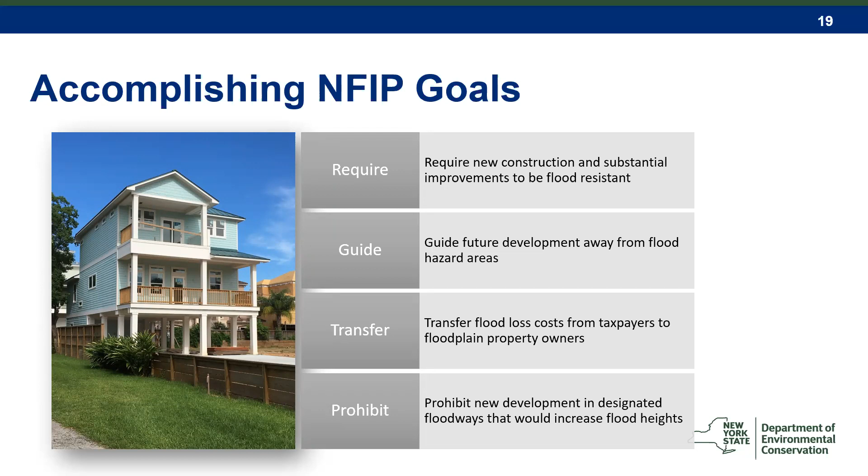So moving on to roles and responsibilities. At the federal level, FEMA is the agency that is responsible for the administration of the National Flood Insurance Program. So they develop the maps that the regulations are based on. They also provide flood insurance. They set the minimum building codes and standards within those areas. They determine community compliance, and then they also have enforcement authority for this program.

The Army Corps of Engineers sometimes gets involved within this program as they can develop flood studies to support the development of regulatory mapping, and they also provide some other floodplain management related services as well.

So at the state level, DEC is designated as the state coordinating agency for the National Flood Insurance Program. So we contract with FEMA to assess community compliance and then work with communities on compliance issues. We provide technical assistance as well as developing a state model ordinance for flood damage prevention. Assessing community compliance is through those community assistance visits or community assistance contacts where either the state or FEMA will come out and meet with the community to talk about the requirements of the program and the local administration.

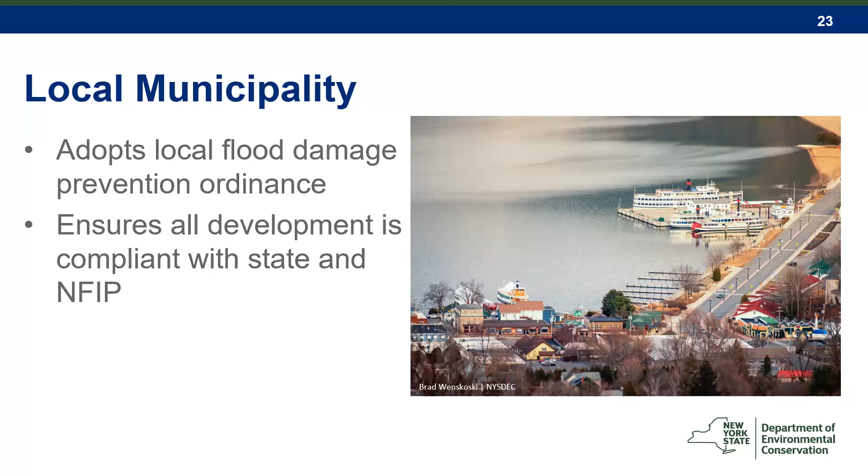So that leads me to our first poll question. Poll question number 1 is going to be a true or false. The DEC permit unit considers local floodplain regulations and NFIP requirements during the review of all permit applications. Okay. So we'll just give it a little bit for responses to come in.

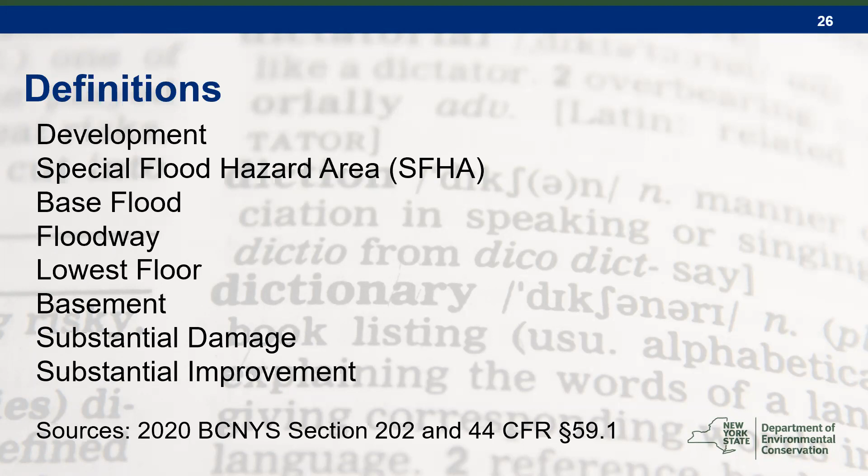Okay, so I'm going to move on to some important definitions. Each of these is going to be covered in this section. I've also included the sections where you can find these definitions within the building code as well as the federal regulations.

So the definition of development for floodplain management purposes is really broad. It essentially means any man-made change to the floodplain. That includes, but is not limited to, buildings or other structures, mining, dredging, filling, grading, paving, excavating, storage of equipment or materials. All of that is considered development under the floodplain management regulations and would require a local floodplain development permit.

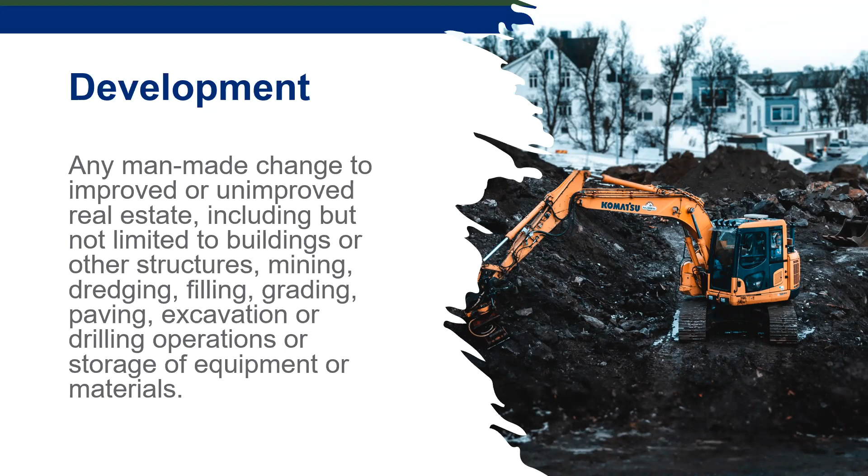So the special flood hazard area is what's referred to as that high risk area or the floodplain. It's the land within a community that's subject to a 1% or greater chance of flooding in any given year. The zones on your maps are going to start with an A or a V, so that's a quick way to know whether it's within the 100-year floodplain.

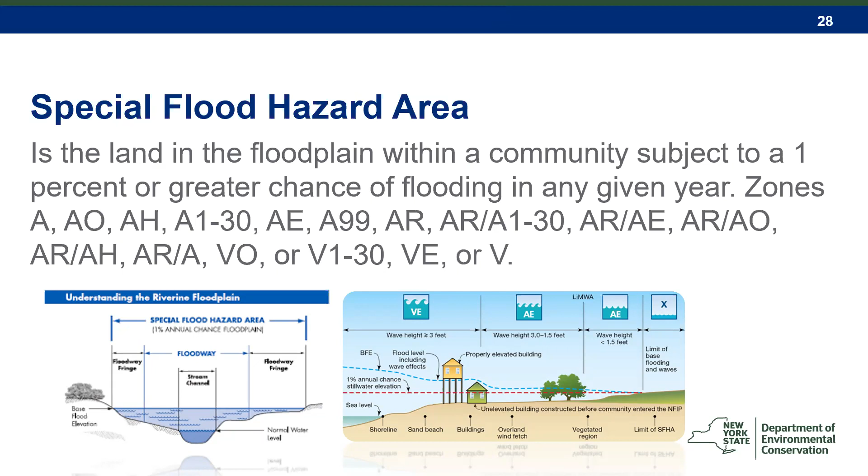So the base flood, previously referred to as the 100-year flood, is the flood having a 1% chance of being equaled or exceeded in any given year. We really try to get away from using the term 100-year flood because it gives the misperception that it's something that's only going to happen once every 100 years.

But this graphic on the slide shows that if you have a structure, say your home is within that 100-year floodplain, and you have a mortgage on your property. Most mortgage terms are for a 30-year period. Over that 30-year mortgage period, you would have a 26% chance of flooding. So much greater than once every 100 years.

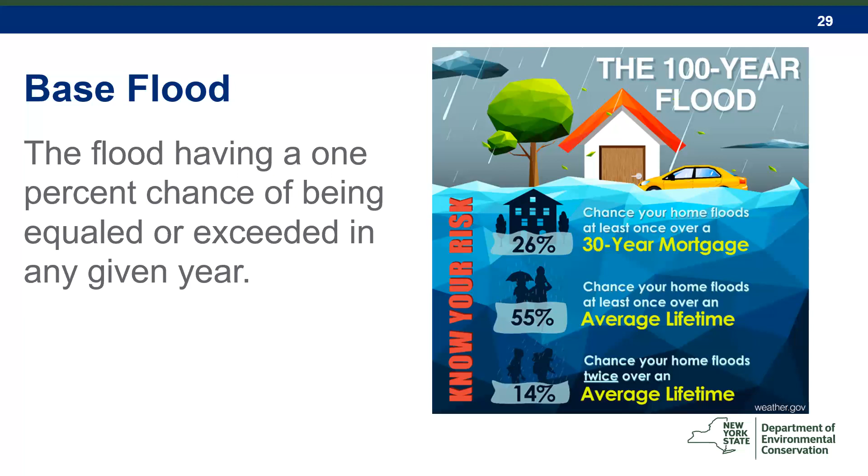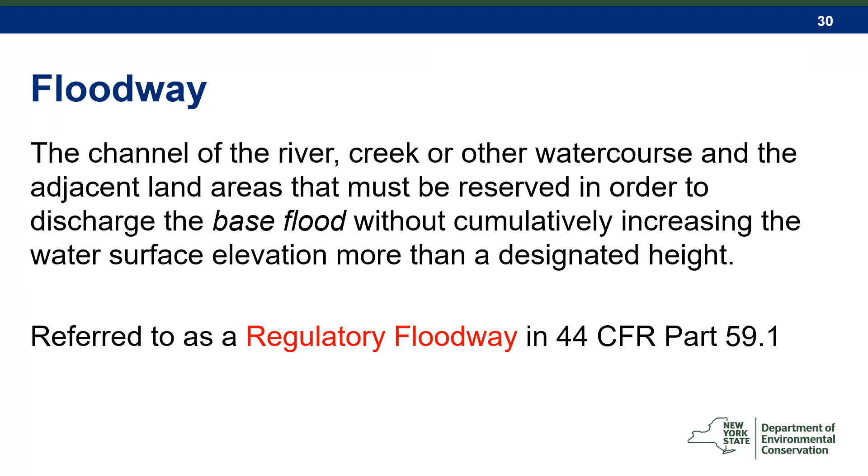So the floodway is an area within the floodplain that is the channel of the river, creek, or other watercourse and the adjacent land areas that must be reserved in order to discharge the base flood without cumulatively increasing the water surface elevation more than, like, any increase in New York State. So that's a 0.00 foot rise. And I'm going to show you how that is modeled and shown on the map.

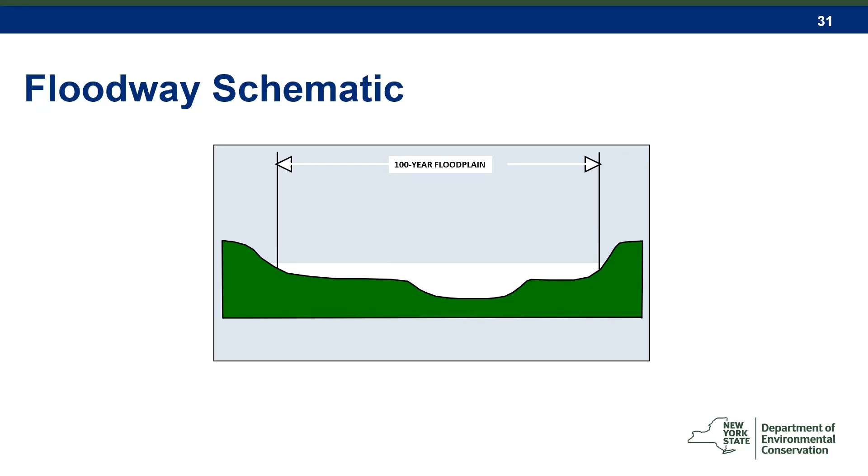So this is showing a cross section of a stream. You can see where the natural channel is here, and this would be the limits of the 100-year or 1% annual chance floodplain. When they're determining the limits of the floodway, they model encroachments or fill being placed on either side of the stream until it results in a 1 foot surcharge at any of those modeled cross sections. Once that 1 foot is reached at any of those cross sections, that designates the limit of the floodway.

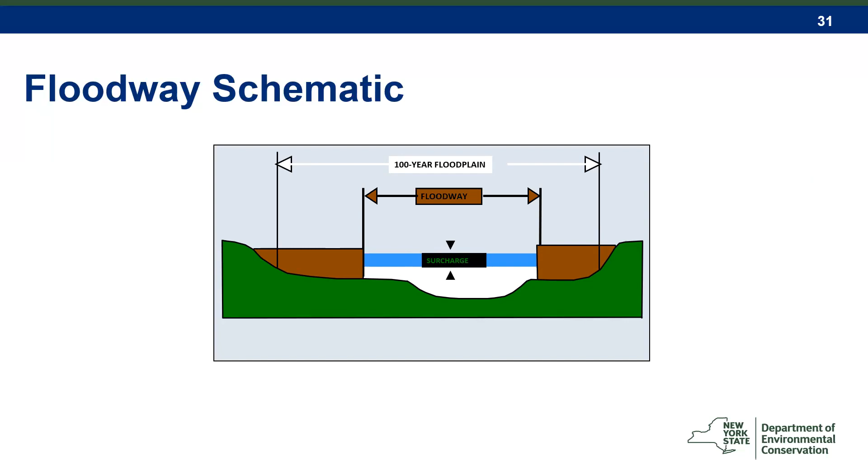So essentially, all development is prohibited within the floodway unless you have an engineering analysis completed that demonstrates that development will result in a 0.00 foot rise.

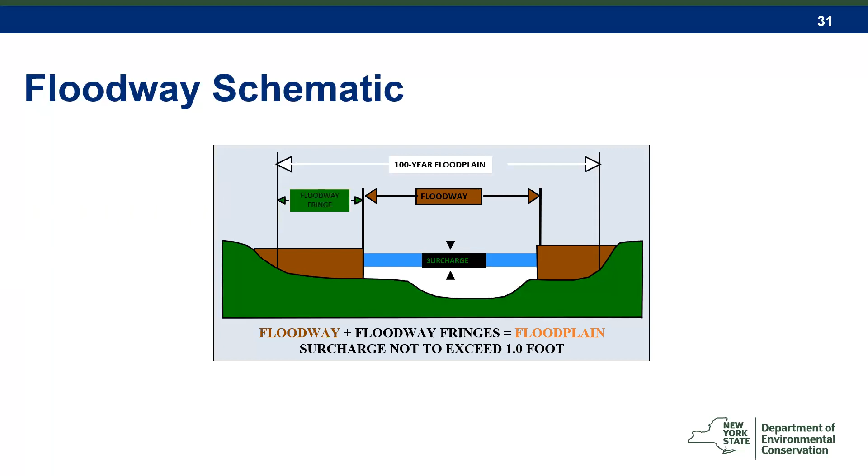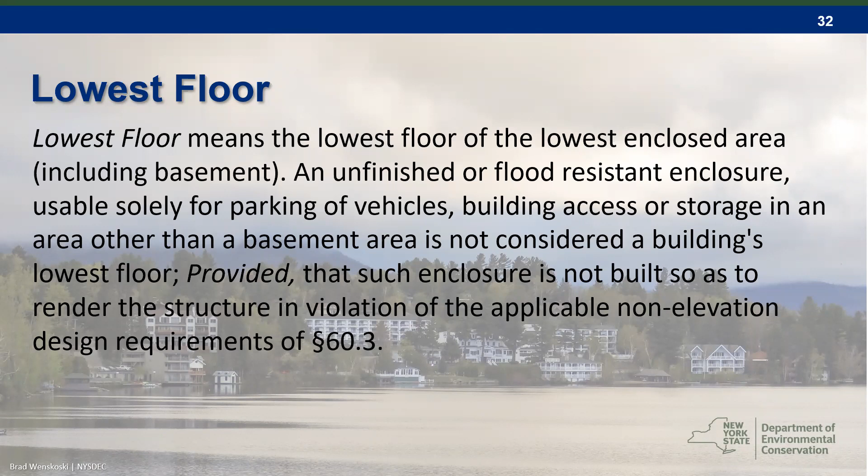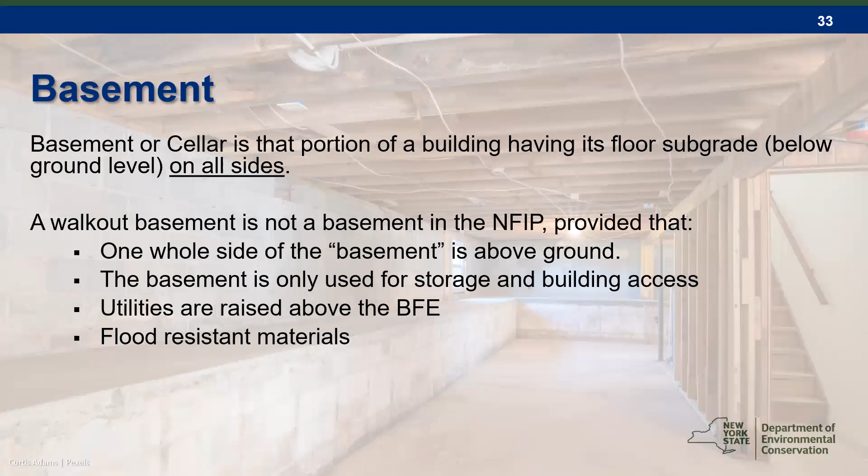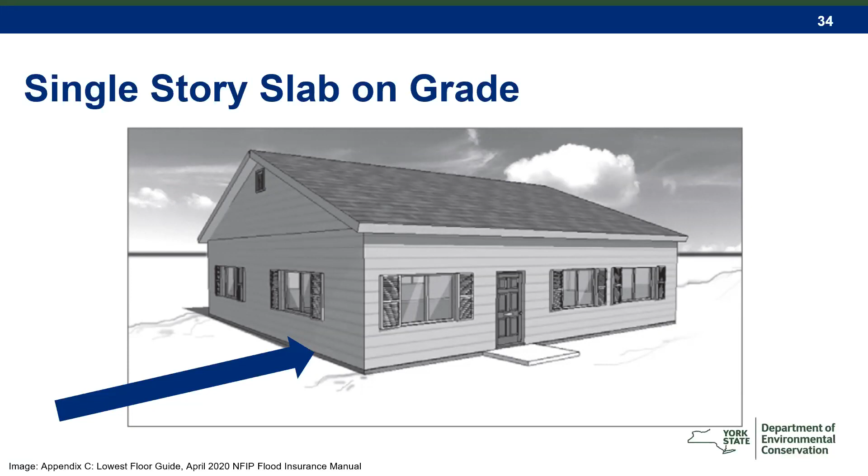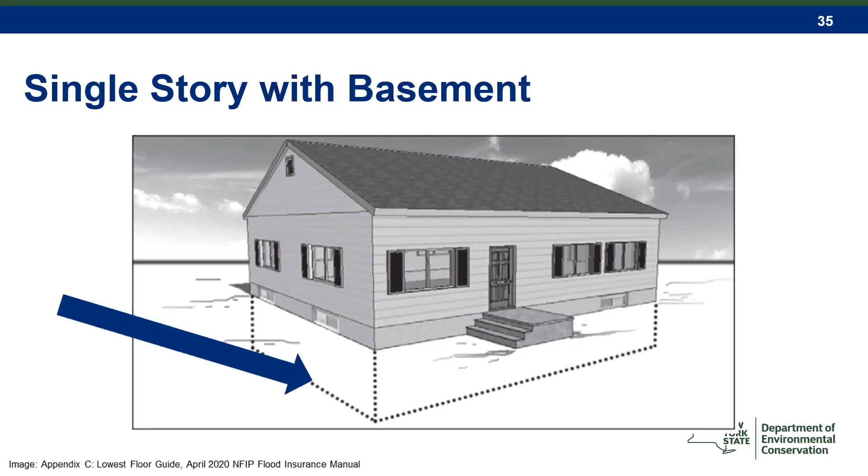Okay, so these give a couple examples of where the lowest floor would be based on different construction types. For a single-story slab on grade home, the lowest floor would be the top of the slab. For a house with a basement, the lowest floor would be the basement slab. For mobile homes with vinyl or aluminum skirting, meaning it's not hard, structural skirting around the building, the lowest floor would be the bottom of the frame.

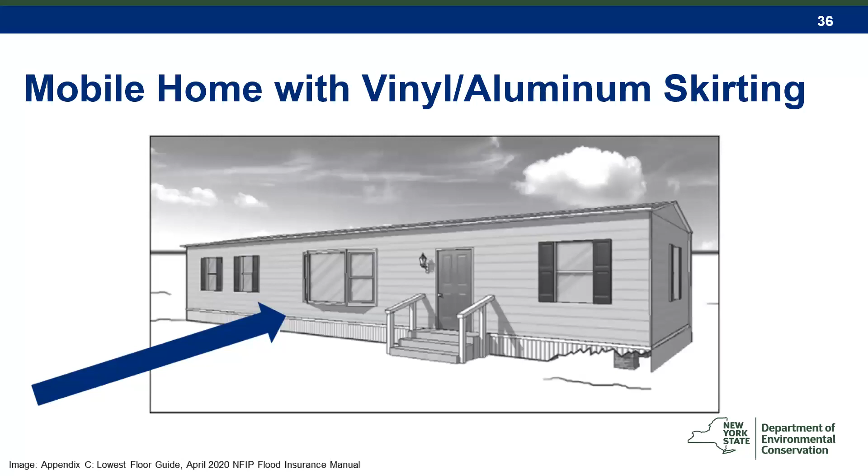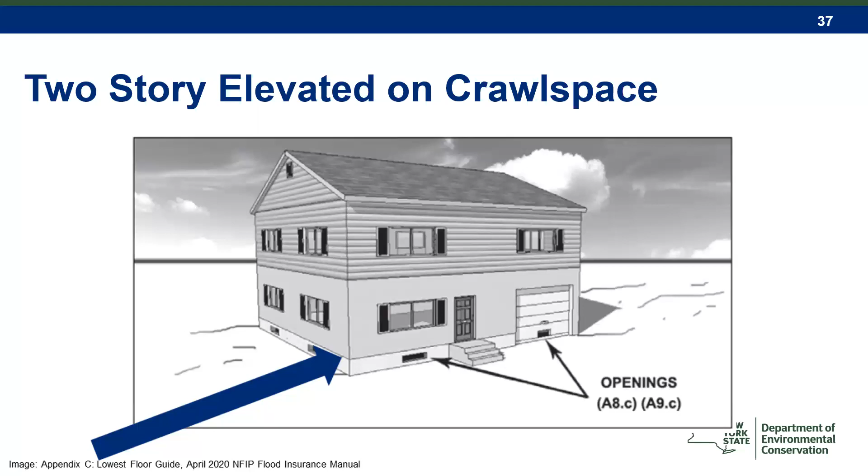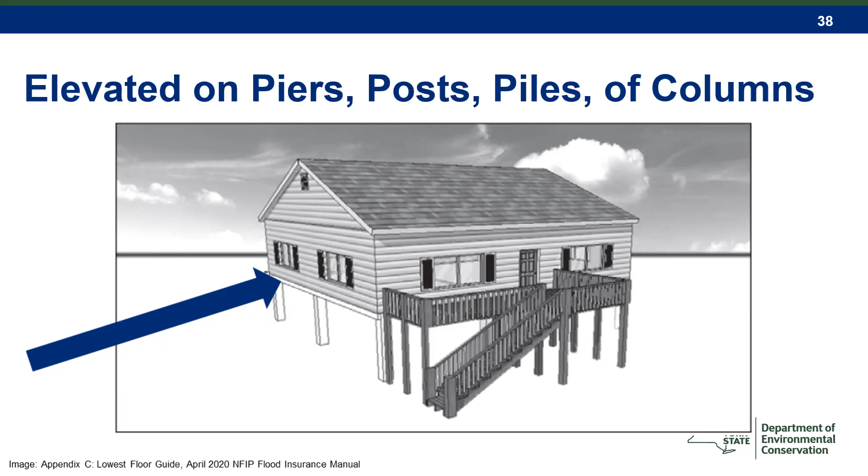So substantial damage is damage of any origin sustained by a structure where the cost of restoring the structure to its before damaged condition would equal or exceed 50% of the market value of the structure before the damage occurred. So one of the key things here is that it is damage of any origin. So it's not just flood damage. So this would apply if there was a fire, an ice storm, a tree falling on it, any kind of damage where it would reach this 50% threshold. And if the structure is within the floodplain, then it's required to come into compliance with current flood damage resistant construction requirements, so elevated.

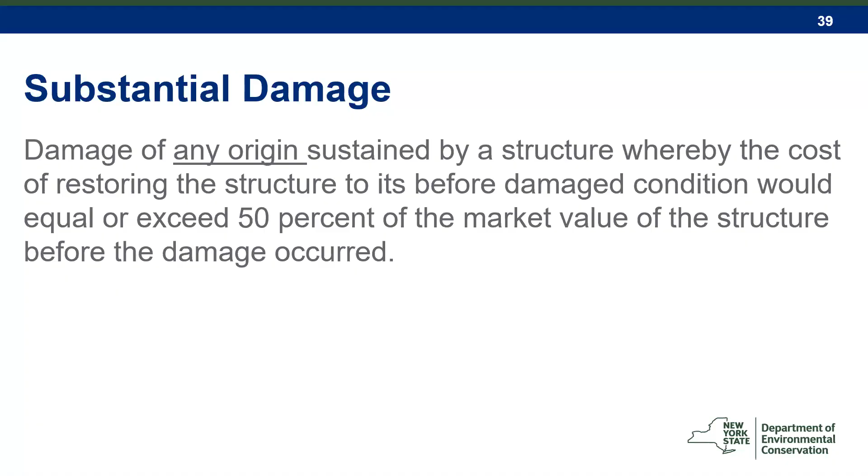Substantial improvement is very similar to substantial damage, but it includes any reconstruction, rehabilitation, addition, or other improvement to a structure where the cost of that improvement equals or exceeds 50% of the market value of the structure before the start of that improvement.

So an example I typically give here is that if you have a house that's located within the floodplain and it's currently worth $100,000 and the owner wants to put in a new gourmet kitchen and a master ensuite, and that project is going to cost $60,000, then they would be required to bring that whole structure into compliance with the floodplain regulations. So elevating it 2 feet above the BFE. And the reason behind this requirement is that FEMA doesn't want people investing a lot of money into a property without first making it more resilient to flood damages.

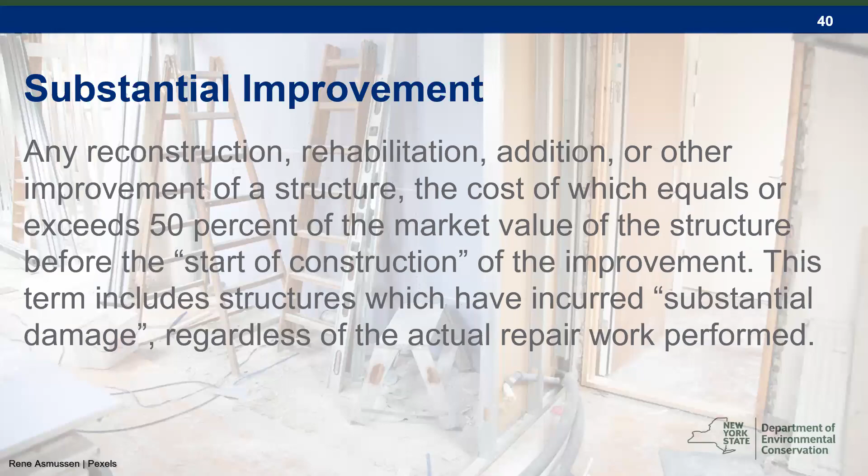So when talking about substantial improvement, there are certain things that are not included in that determination. So any project for improvement of a structure to correct existing violations of state or local health, sanitary, or safety code. The key thing is that these have to be previously identified and cited by a local code enforcement official. And it would only be the minimum necessary to correct the violation.

And then any alteration of a historic structure, provided that that alteration would not remove the structure from its historic designation. When we're talking about historic structures, that means they have to be designated on either a state or a federal registry to be considered historic.

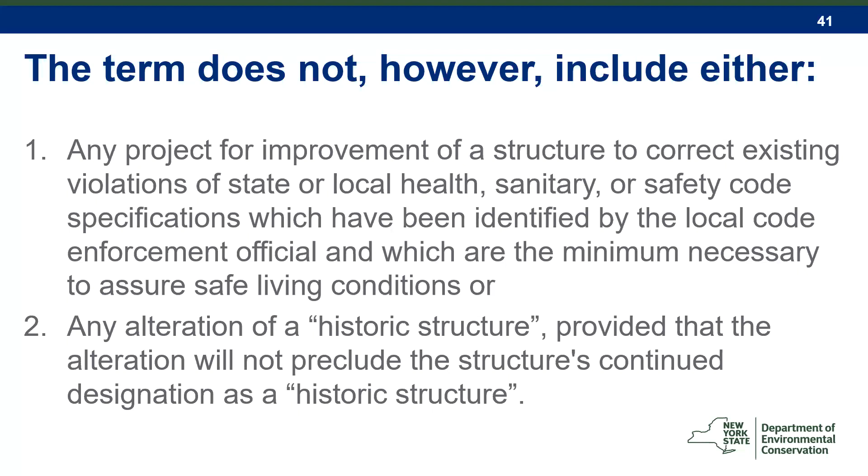Okay, so on to our next poll question. So poll question number 2, a structure could be considered substantially damaged due to A, a fire, B, flood, C, tree falling on the structure, or D, all of the above.

Okay, so if you haven't submitted your answer, go ahead and wrap it up. Okay, so the correct answer here is D, all of the above. So damage from any origin that would bring it over that 50% threshold.

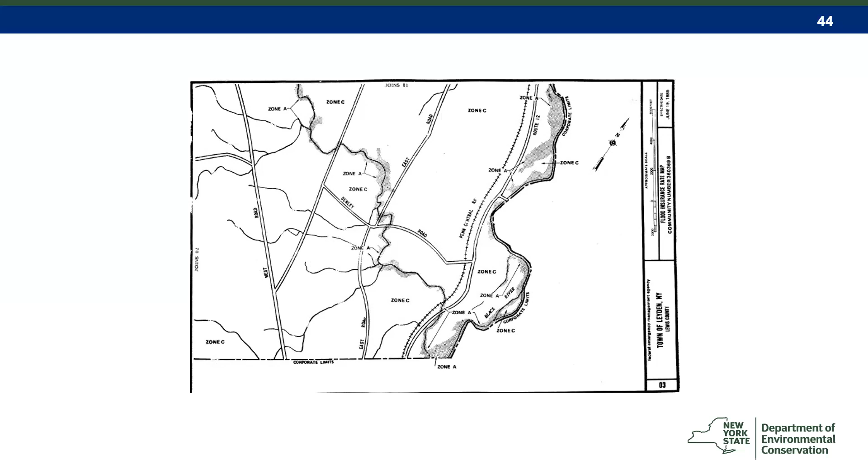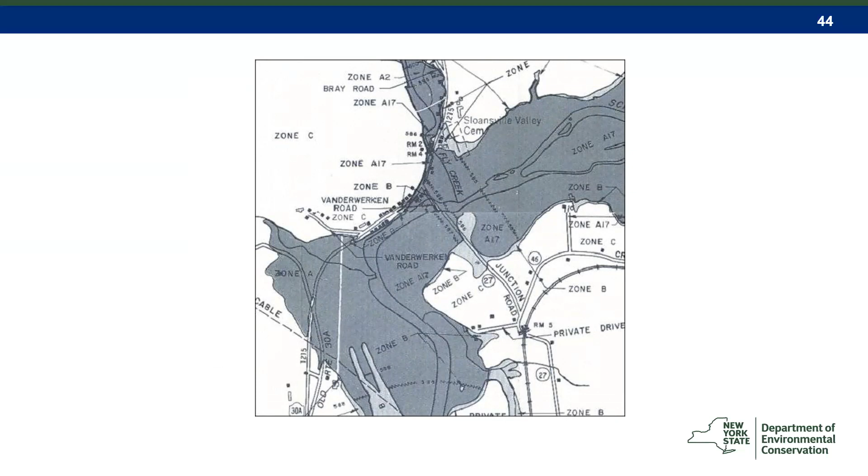Then we start to see mapping that looks a little bit more like this. That gray shaded area is designated as Zone A, and that's within the 100-year floodplain. So still difficult to use, and some communities in New York still have this as their effective regulatory mapping. So this is a FIRM that has a detailed study, meaning that there are elevations established for this. So those numbered A zones have a base flood elevation determined.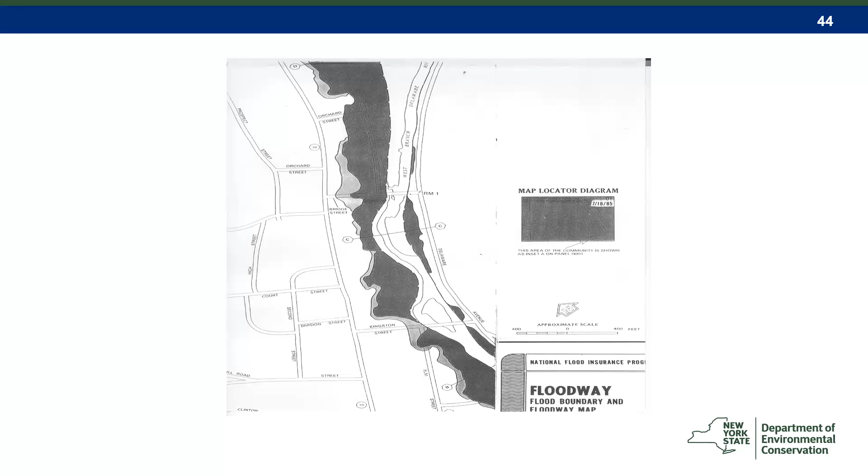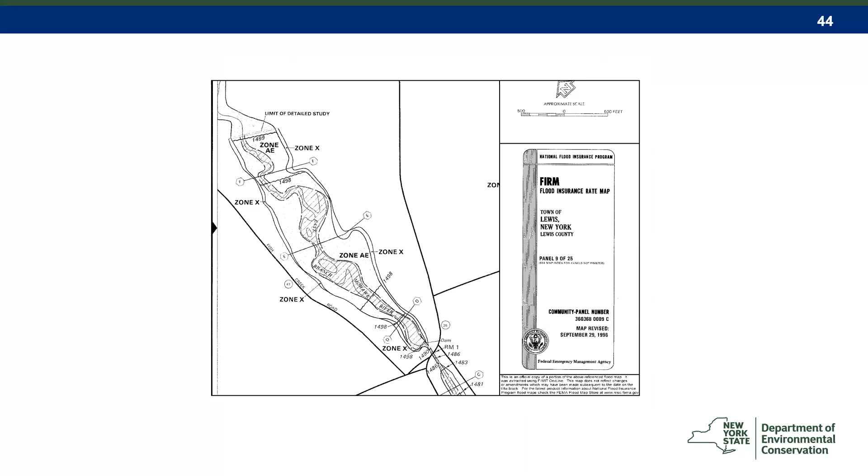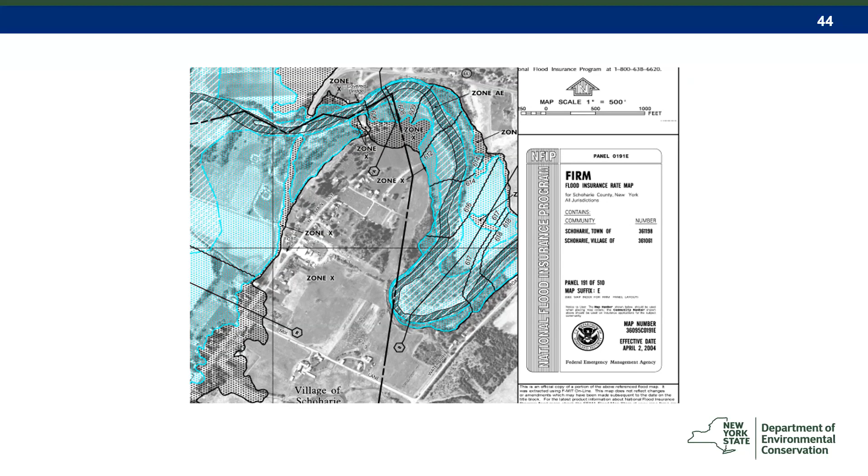So the next iteration of mapping, we see that they have the floodway designated on the same panel, and that's shown as that crosshatched area in the center. In the early 2000s, they started to move towards map modernization to allow for mapping to be in a digital format. So it was produced so it can be over aerial imagery, which makes it a lot easier to identify whether a structure or particular development is located within the floodplain.

And this is what the mapping looks like for most communities now that are getting new updated studies. So the floodway is shown as that red hatched area in the center. This is also showing an area that is susceptible to both riverine and coastal flooding impacts. So those V zones shown on the left stand for velocity. Those velocity zones are susceptible to wave action and wave run up as well.

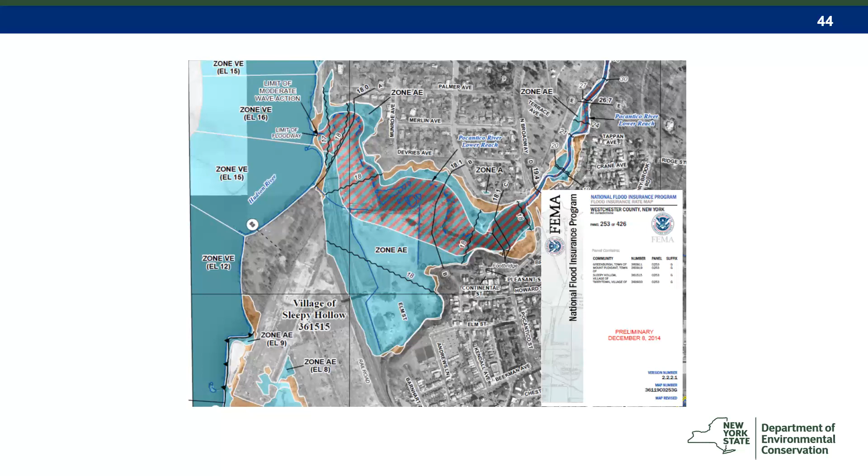Once we move into map modernization and digital products, mapping is done on a county-wide basis instead of a community basis. So you would see a map panel number that would list potentially multiple communities that are on that particular panel.

So when trying to read an older paper-based map, you first want to look at that map index to find which panel your property or development is going to be on. So you want to look for any major roads and waterways to kind of figure out where your location is, and then figure out which particular panel you are going to be looking at. Once you have the correct panel number, you can navigate to your particular site location.

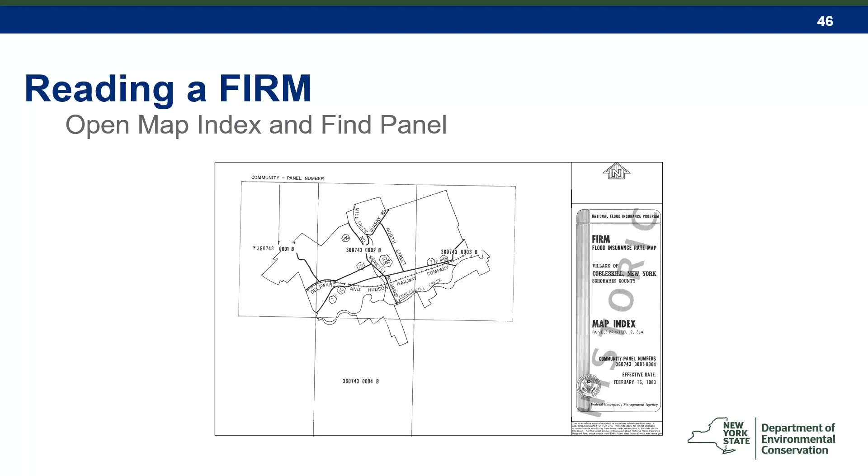So some map features to look out for. This is showing an example. This is not what most FIRMs look like, but this is an area that has a portion that has a detailed study, that zone AE, with base flood elevations established. It also has an approximate or unnumbered zone A at the top there, which means it's an area without base flood elevations established. The wavy lines on the map show approximate base flood elevations. In order to get the detailed base flood elevations, you would need to use the flood profiles in the back of the flood insurance study.

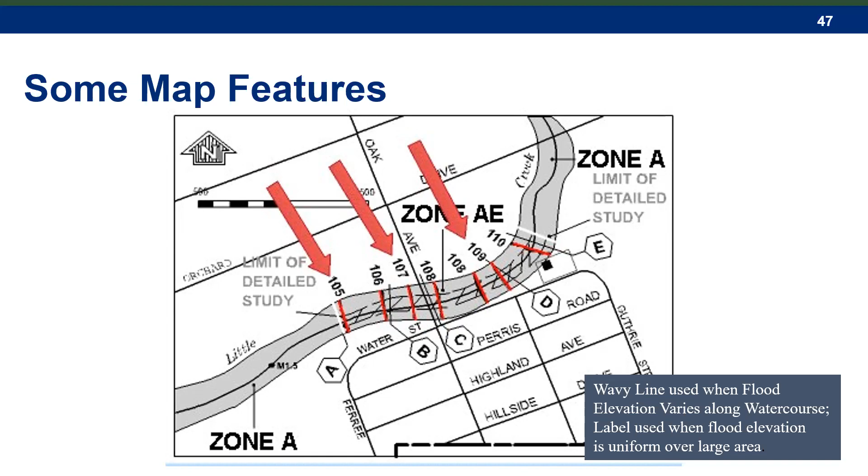So looking at a flood insurance study, this is a document that includes all of the engineering support for development of the mapping. So it has information for how the maps were developed. It provides information related to flooding impacts within the community, how they determined the hydrology and the hydraulics for the study. So there can be a lot of really helpful information in there.

So some helpful sections that might be included within the flood insurance study are going to be for still water elevation. So if you have areas that have flood impacts related to Great Lakes or inland lakes, these can be really helpful tables to refer to. So this one shows what the flood elevations are for different annual chance events. The one you would be looking at is that 1% annual chance event. So you can see for this particular community, looking at Cayuga Lake, for the 1% annual chance, the base flood elevation is going to be 385.8.

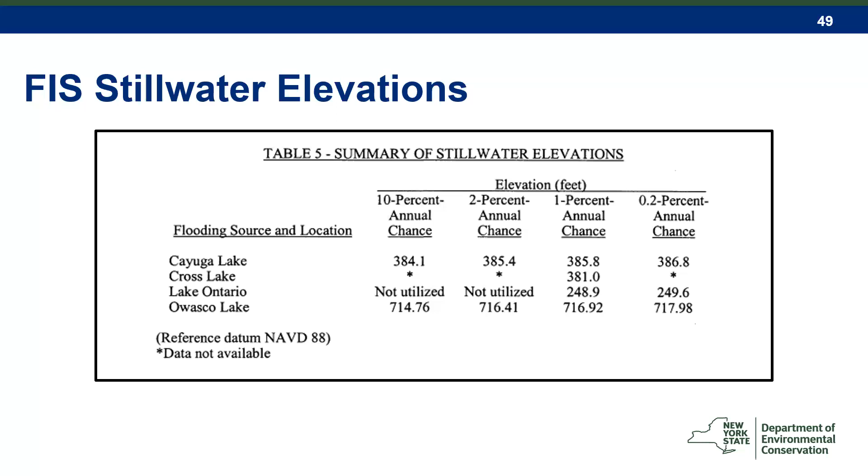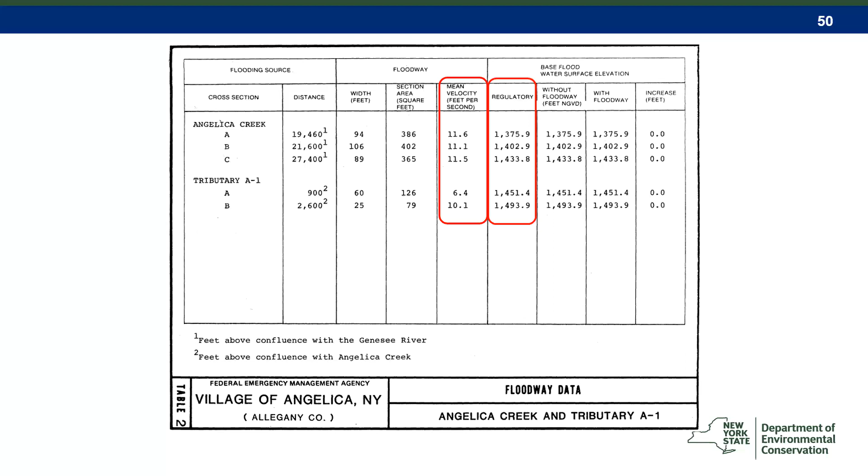You can also find out what that regulatory base flood elevation is at that particular cross section. This can be helpful. It's not very often that development will fall right at a cross section, but if it does, then that can be used as the base flood elevation when determining how to properly elevate a structure. But when you are looking at what is the base flood elevation for your particular site, you can determine if you're close or within range, if that number is within the base flood elevation shown between those two cross sections.

So this is showing kind of how those relate. So on the right-hand side, you see an example of a flood insurance rate map. You can see where those cross sections line up to that floodway data table in the flood insurance study. So cross section E corresponds to that cross section E shown on Pinnacle Creek here. You can see what the mean velocity is at that cross section, which is 3.5 feet per second. And then the regulatory base flood elevation at that cross section, which is 569.5.

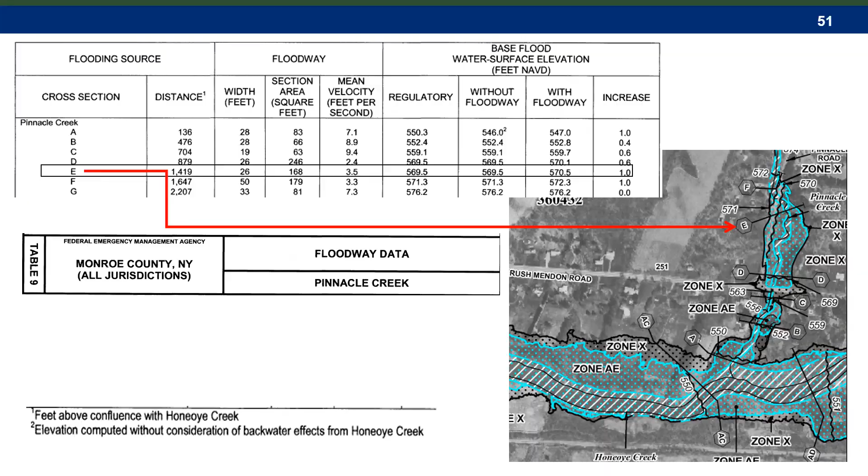So this is what you would need to use in order to find the detailed regulatory base flood elevation where there's a detailed riverine study. So in a riverine floodplain, you need to go to the flood profile in order to get the base flood elevation to the nearest 1/10 of a foot.

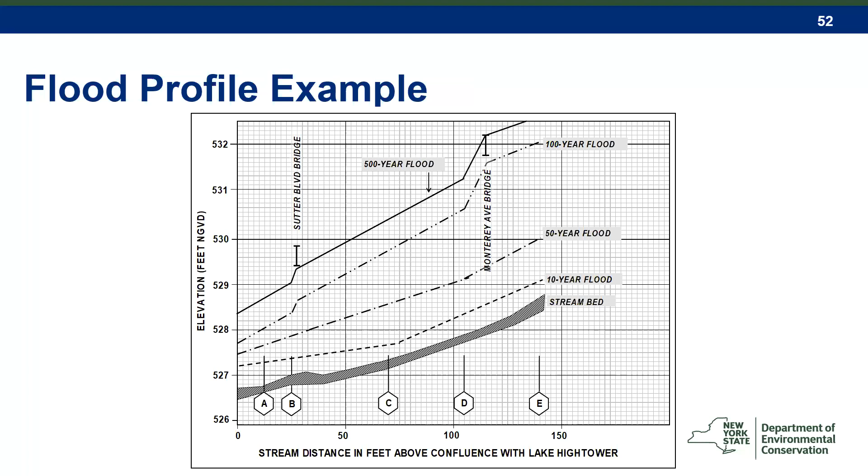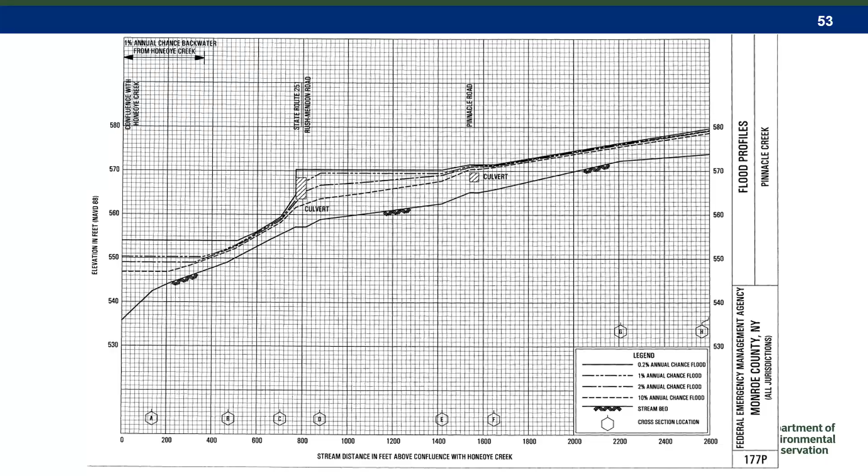So this is showing that same FIRM and where that flood profile lines up to those particular cross sections. I mentioned here highlighting that one culvert that is sized so that it can pass that 1% or 100-year event.

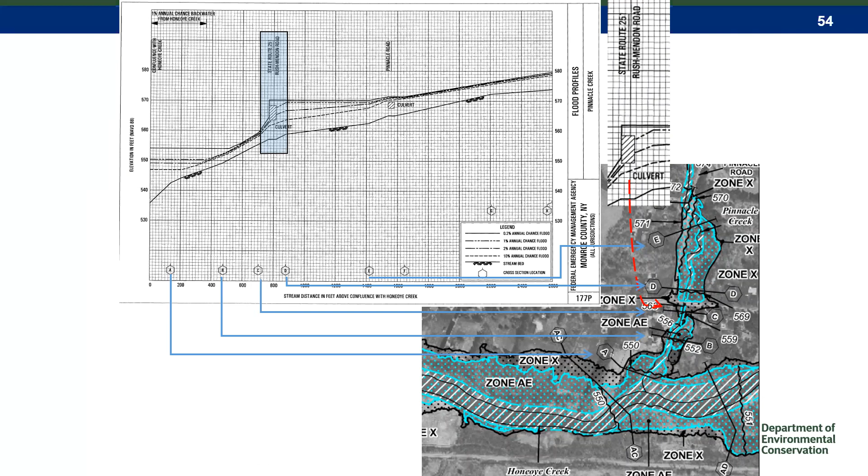So I did just want to mention some base level engineering and what that is and what it can be used for. So like I mentioned, there are many communities within New York State that are still using paper-based maps as their effective regulatory products. So base level engineering is a product that's available and can be used as best available information in communities that do not yet have digital mapping.

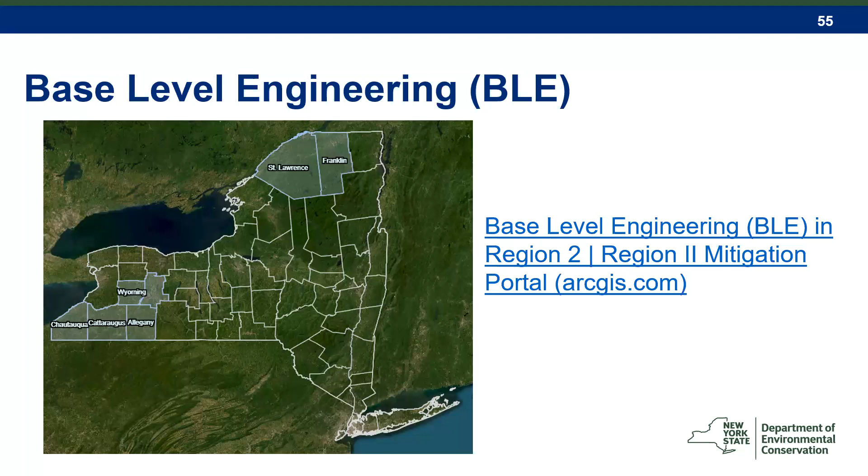So BLE is an engineering method that combines high resolution ground elevation data and modeling software to generate watershed-wide flood hazard information. So it makes it much more cost effective. It does not include any ground truthing or surveys to support that. It's using LiDAR data when modeling.

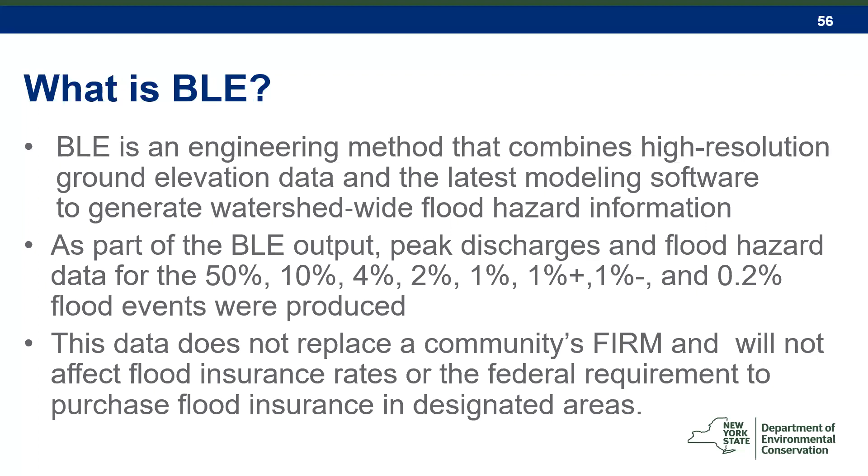As part of that BLE output, it does develop peak discharges and flood hazard data for various flood level events. And this data does not replace a community's flood insurance rate map, and it won't affect any flood insurance rates or flood insurance purchase requirements, but it can be used as best available data.

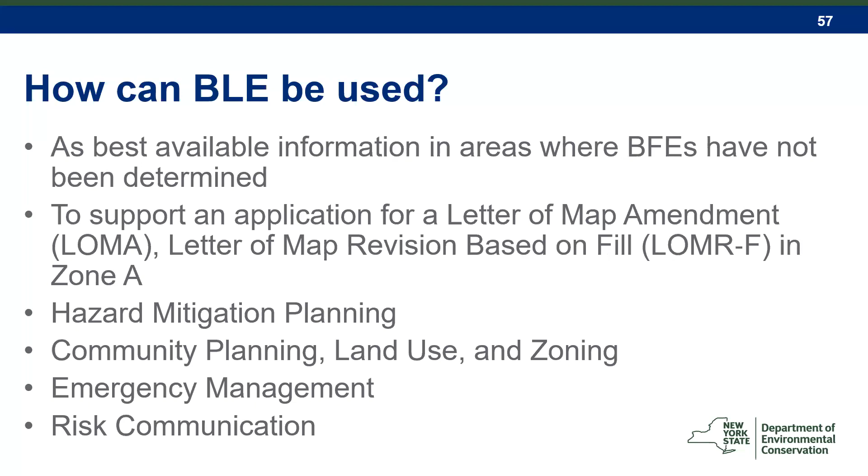So in areas where there are not base flood elevations established, you can use this base level engineering mapping that does have base flood elevations established as regulatory. It can be used to support an application for a letter of map amendment or a letter of map revision based on fill to FEMA to remove a particular property or structure from the mapped floodplain in order to remove that mandatory purchase requirement for flood insurance. It can also be used for hazard mitigation planning, community planning, emergency management, as well as risk communication.

If you are looking for more local support, again, they should be available at the local community offices. Sometimes county and regional planning offices will have copies of the maps, but you can also reach out to DEC, either our regional offices or me if you're looking for a map and you can't find it or wondering whether a proposed development would be within the floodplain.

So our third polling question. So where do you get the base flood elevation or BFE to the nearest 1/10 of a foot in a riverine floodplain? So A, the flood insurance rate map or FIRM, B, the flood profile in the back of the flood insurance study, or C, the summary of still water elevations table, or D, USGS river gauges?

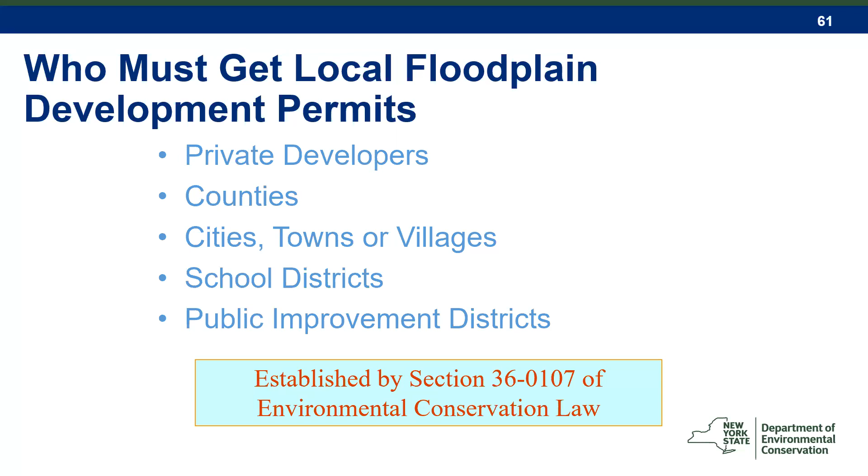So for residential construction, any new or substantially improved residential construction is required to have the lowest floor, including a basement, elevated to or above the base flood elevation, plus 2 feet of freeboard in New York State. They're required to obtain and reasonably use data from a federal, state, or local source if there is no base flood elevation established on their current mapping.

If there isn't an available base flood elevation through other sources, then they're required to have a professional develop that flood elevation by doing an analysis for that particular site. And then any subdivisions or other type of development that's over 50 lots or over 5 acres requires the applicant to provide flood elevation data and then build accordingly.

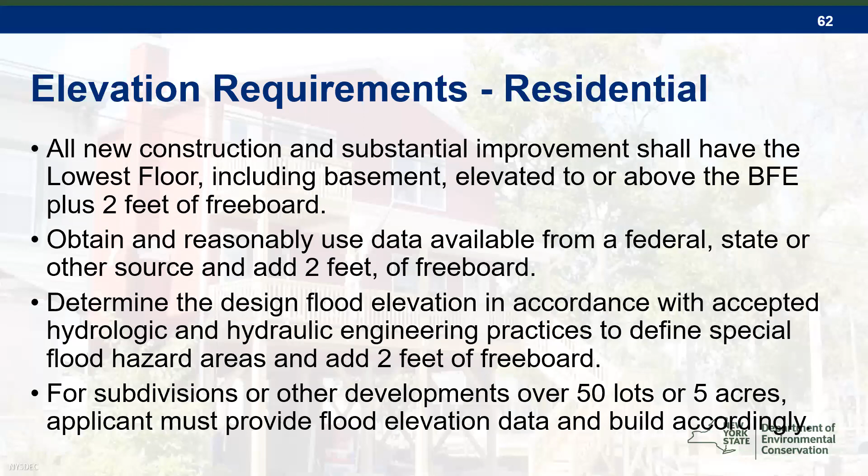So elevation options when talking about residential structures is that you can elevate on an open foundation, so posts, piles, columns, or piers. You can also elevate on a stem wall foundation, full story foundation walls, a crawl space, or a fill pad. And each of these technical bulletins that are shown on the right here provide additional guidance on each of those.

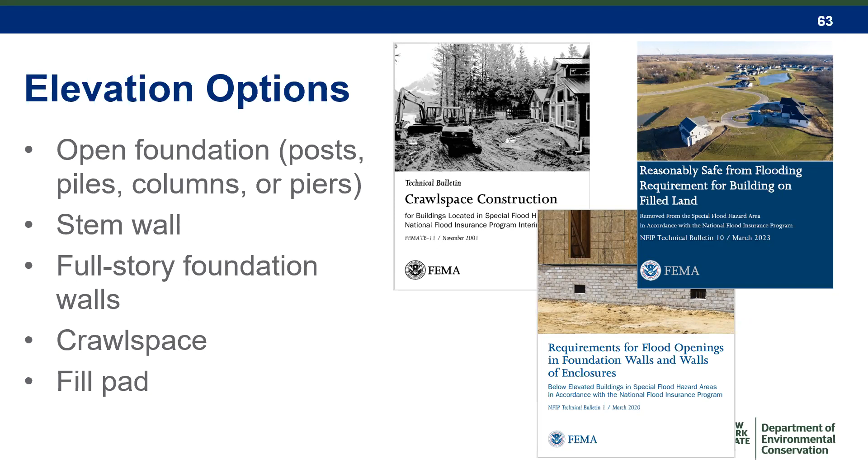So when I talked about the lowest floor determination, I mentioned openings or flood openings, flood vents. Those are required for any enclosures that are below that design flood elevation, so that BFE plus 2 feet. Any enclosures below that elevation are required to have flood openings that automatically allow for the entry and exit of floodwaters. It requires that there be a minimum of 1 square inch per square foot of enclosed floor space, and that's measured along the exterior of the enclosure walls.

They need to allow for the automatic entry and exit of floodwaters, so it can't have any permanent closures or louvers in place that block that. There need to be at least 2 openings on 2 different walls, and the bottom of each opening must be within 12 inches of grade, either interior or exterior, whichever is higher.

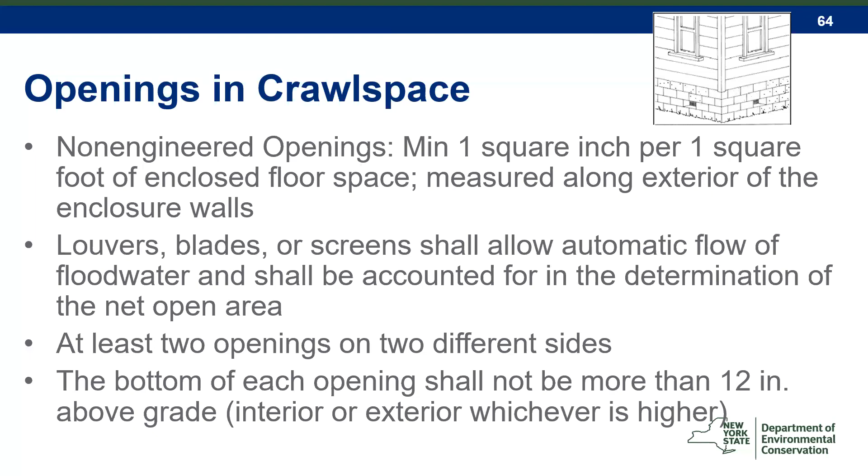For non-residential structures, non-residential structures are also required to be elevated so that the lowest floor is at least 2 feet above the base flood elevation. There is an exemption for areas where there is not a base flood elevation established, where it allows for the structure to be elevated at least 3 feet above the highest adjacent grade. For any development that would be over 50 lots or over 5 acres, it would still require that a flood elevation be developed as part of that project.

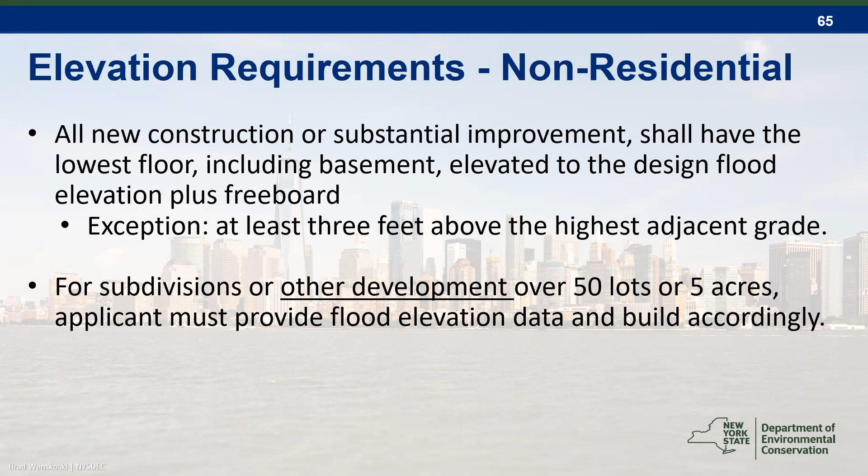So this is showing an example of how you would determine where that highest adjacent grade is and what that elevation requirement is. So if it's in an unnumbered A zone or approximate A zone where there are no base flood elevations established, non-residential structures can elevate 3 feet above that highest adjacent grade. So this image shows where that highest natural grade would be adjacent to the footprint of that proposed structure. And then you would add 3 feet to that to know where your lowest floor elevation would have to be.

So this exemption is no longer allowed for residential structures. With the updated 2020 residential code, it now requires for all residential structures that they have a base flood elevation established. So this option is only available for non-residential structures, but that is likely to change with another update to the code.

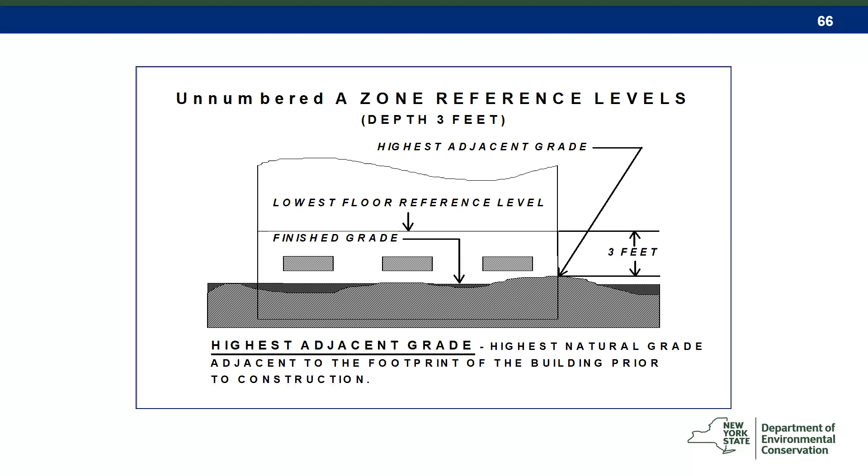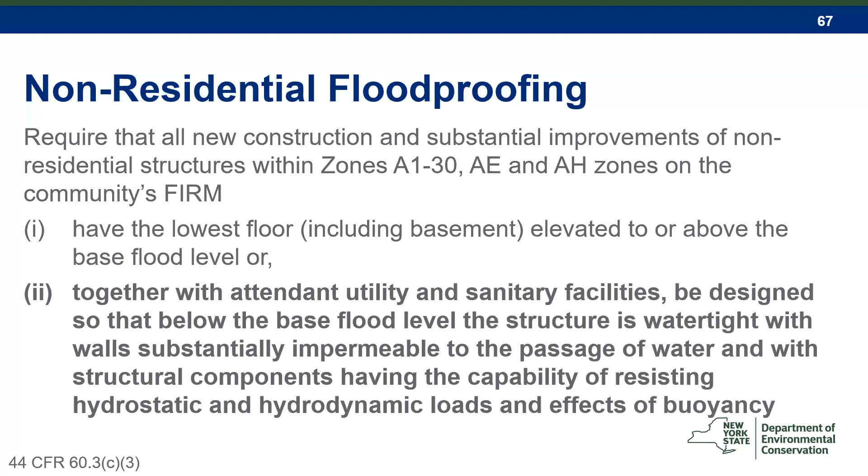So non-residential structures also have the option to dry floodproof rather than elevating. So it requires that all new construction and substantial improvement have either lowest floor elevated or together with attendant utility and sanitary facilities be designed so that below the base flood elevation, that structure is essentially watertight and substantially impermeable to the passage of water. So when you see floodproofing referenced in the regulations, it is referring to dry floodproofing. So that means making the structure impermeable to water.

There is an entire technical bulletin specifically on dry floodproofing and how to meet those requirements. It does require design and certification by a professional engineer, and that dry floodproofing certification needs to be provided to the community.

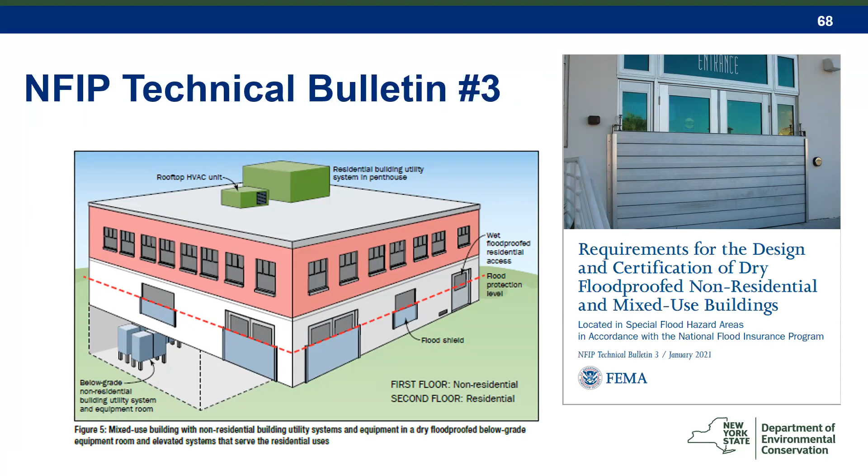So all utilities, whether they're residential or non-residential, they should be elevated 2 feet above that base flood elevation, or designed and installed to prevent water from entering or accumulating within the components, and be resistant to any hydrostatic or hydrodynamic loads, including the effects of buoyancy. Any electrical wiring below that elevation would have to conform with the electrical code for wet locations. You want to elevate or waterproof any electric meters; replacement components only applies when it's new construction or substantial improvement. And it cannot be mounted on or penetrate any breakaway walls.

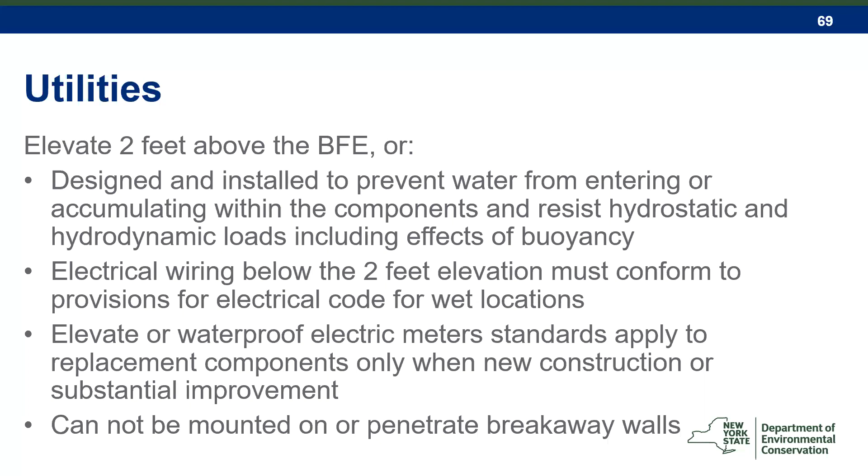So storage tanks, any gas or liquid storage tank that's principally above ground is considered a structure under the regulations. So above ground tanks must be installed at or above the BFE plus the 2 foot of freeboard and properly anchored. Any underground storage tanks must be designed to resist any flotation, collapse, or lateral movement, including the effects of buoyancy.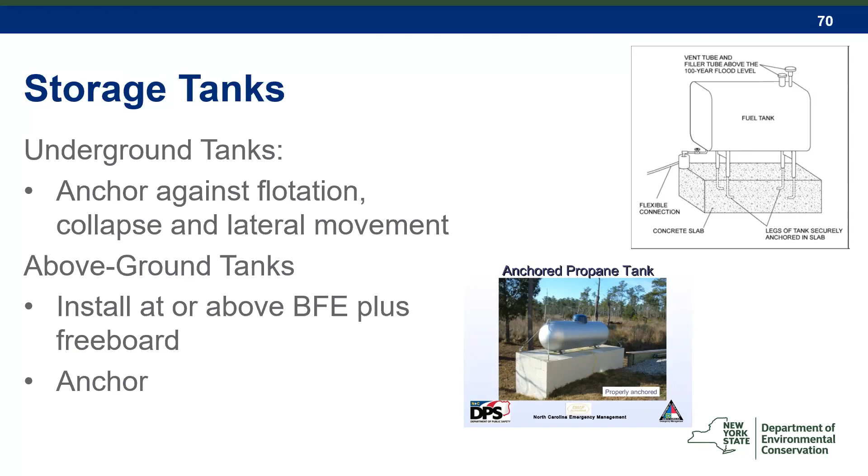So accessory structures, things like garages, smaller sheds or storage buildings, pole barns, should be constructed in accordance with ASCE 24. Structures that are generally used for just storage or parking of vehicles, like those detached garages, they may have the option to wet floodproof rather than elevating.

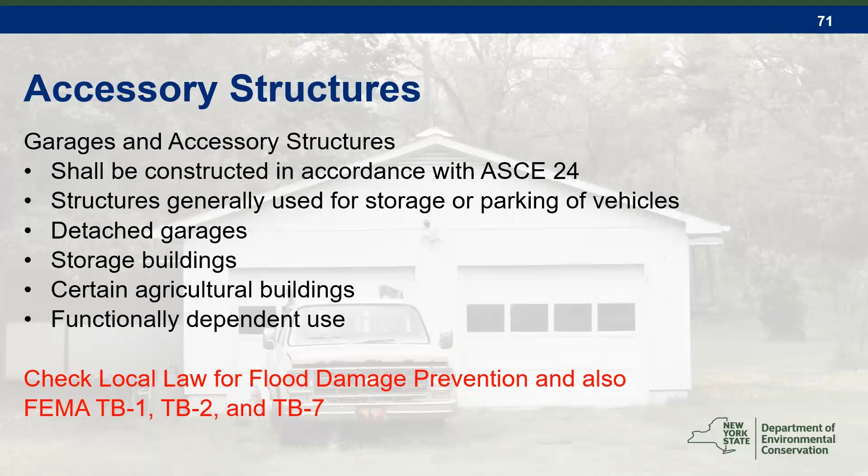So some local laws do include the provision that allows for wet floodproofing of certain agricultural or accessory buildings. If your community does not have that provision included within your local law, it would require a local variance prior to allowing this type of development. And if you're not sure about this, you can always reach out to our office for additional guidance on that.

So manufactured homes are required to be elevated so that the bottom of the frame is at least 2 feet above that base flood elevation. They're required to be anchored to a permanent foundation and have tie down requirements. If it has a solid foundation below that, then that area needs to be vented.

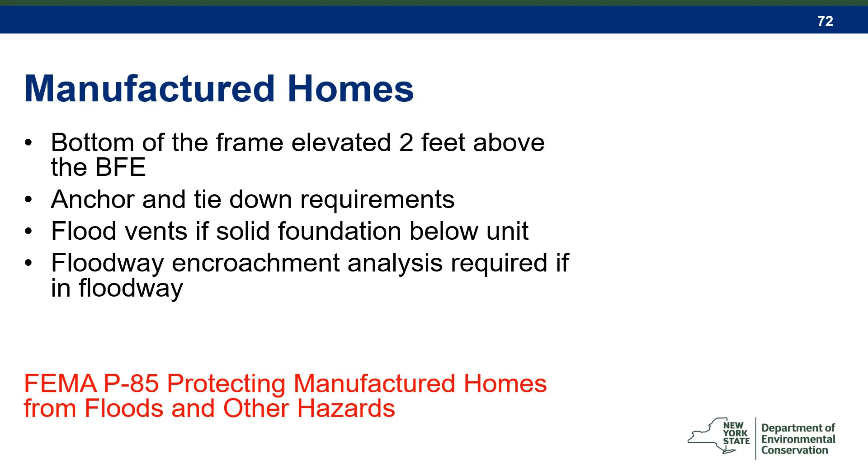And then if they are going to be placed within a regulatory floodway, that floodway encroachment analysis is still required. There is a guidance document specifically related to manufactured homes. FEMA's P-85 is dedicated to protecting manufactured homes from floods and other hazards.

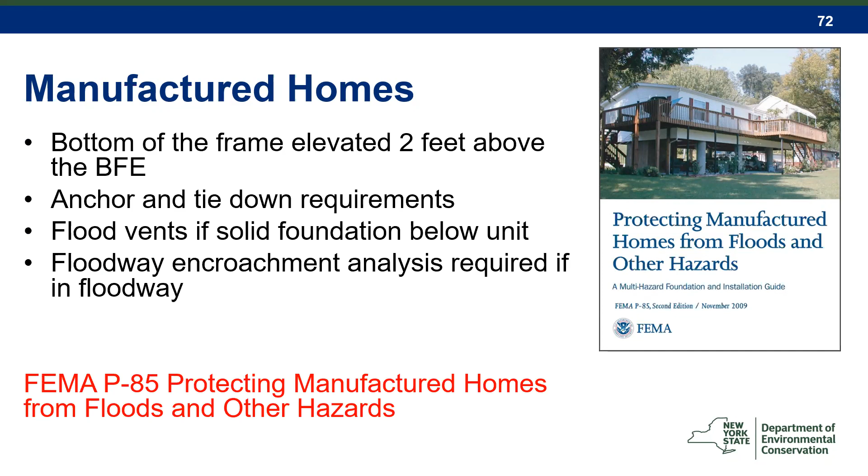So recreational vehicles. Recreational vehicles, if they are located within zone AE or A1 through 30, or AH, so any of those detailed A zones where there's base flood elevations established. Requirements for RVs are that they be on site for fewer than 180 days or be fully licensed and ready for highway use. They have to have quick disconnect utilities with no permanent attachments in order to meet that requirement. But if it meets either of those two requirements, a local permit is not required for an RV.

If it can't meet those requirements, so it's going to be on site for more than 180 consecutive days, or it's not licensed and ready for highway use, then it would need to be elevated and anchored and meet all of the requirements of a manufactured home.

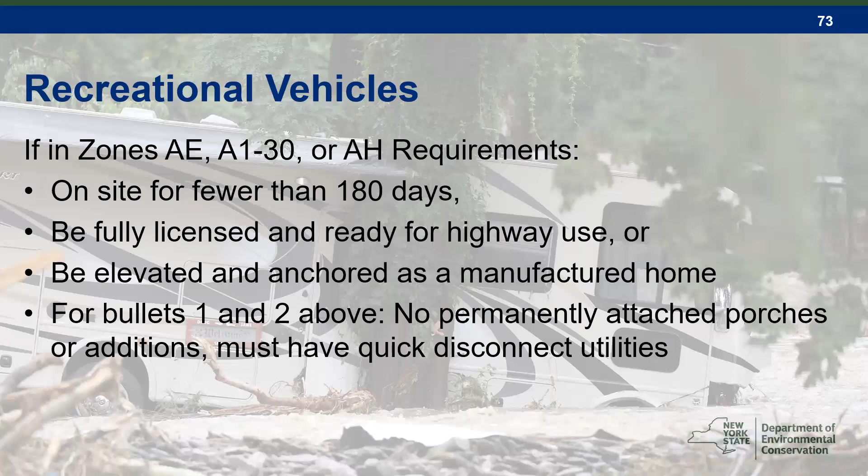So I did mention some of the technical bulletins that are available, but this is a list of all of the technical bulletins. So these have a wide range of topics that go more in depth on specifics, such as venting requirements, flood resistant materials, dry flood proofing, wet flood proofing. Each of these bulletins can help state and local officials interpret the NFIP regulations and can also be a useful resource to provide to homeowners, insurance agents, building professionals, or design professionals.

So FEMA is in the process of updating these forms. So if you always just Google the NFIP technical bulletins or use the link available here, then you will know that you're getting the most up-to-date form.

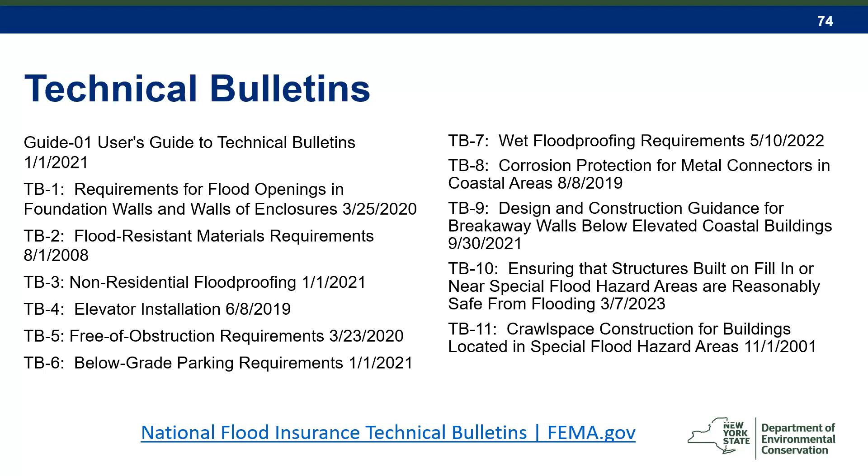Okay, so on to our next poll question. So poll question number 4, this is a true or false. Non-residential structures have the option to dry floodproof instead of elevating. Okay, so it looks like that poll is launched. So I'm just going to give it another minute or so.

Okay. So the correct answer here is true. So non-residential structures do have the option to dry floodproof rather than elevating.

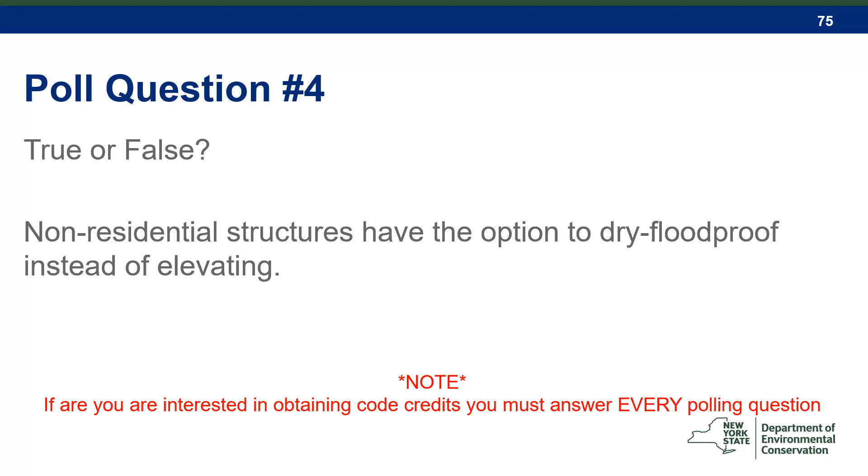Okay. I'm going to move on and talk a little bit about flood insurance to kind of close this out. So Risk Rating 2.0 or Equity in Action is what's referred to as FEMA's new flood insurance rating methodology. So this became effective for all policies starting April 1st of 2022. Some important takeaways for this change in insurance rating is that the FIRMs and the base flood elevations are still going to be used to determine mandatory purchase requirement. So it doesn't change the mandatory purchase requirements, and it doesn't change the requirements for floodplain management purposes. So the FIRMs and the BFEs are not changing.

Elevation certificates are no longer required for rating an insurance policy, but they are still required for floodplain management purposes. So any new or substantially improved structures within the floodplain should have an elevation certificate completed based on finished construction that demonstrates that that structure was properly elevated and is in compliance. So those should still be submitted for floodplain management, but they are not required for insurance rating.

There are standard mitigation discounts that are available for elevating the machinery and equipment above the first floor, having proper flood openings, and elevating on an open foundation such as posts, piles or piers. So all of those mitigation discounts would be available whether you're within the mapped floodplain or not.

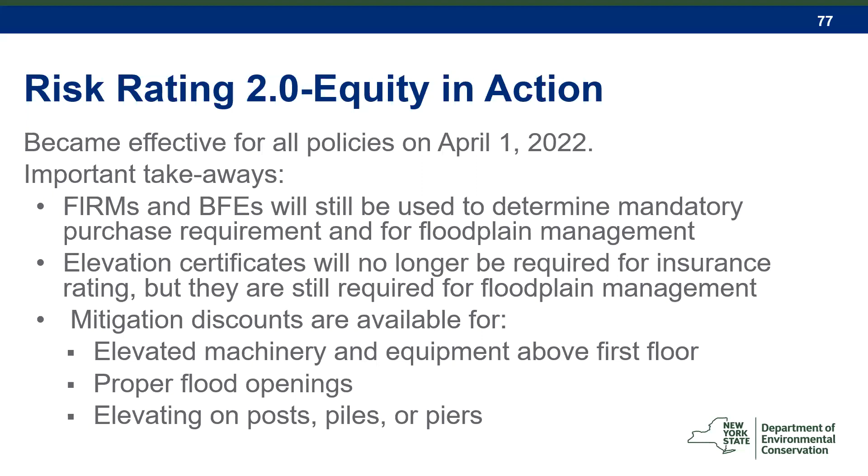So local officials are not required to answer questions about insurance or make determinations for financial institutions. So if someone within your community has questions regarding flood insurance or their premium, you can always refer them to floodsmart.gov or their insurance agent. So floodsmart.gov is the official federal flood insurance resource. There's information available on that website on how to buy flood insurance, what is covered under a flood insurance policy, and then how to find a provider in your area.

There's also information on the flood insurance advocate. If someone has concerns about their flood insurance premium or costs, they can always request assistance through that service as well.

So one component about flood insurance that would be relevant to communities is ICC coverage, or increased cost of compliance coverage. So this is part of a flood insurance policy, which provides up to $30,000 to help cover costs to comply with state or community floodplain management laws or ordinances after a flood event in which a building has been declared substantially damaged or repetitively damaged. So this is available for residential and non-residential structures. It would provide up to $30,000 to either elevate, relocate, demolish, or dry flood proof if it's a non-residential structure.

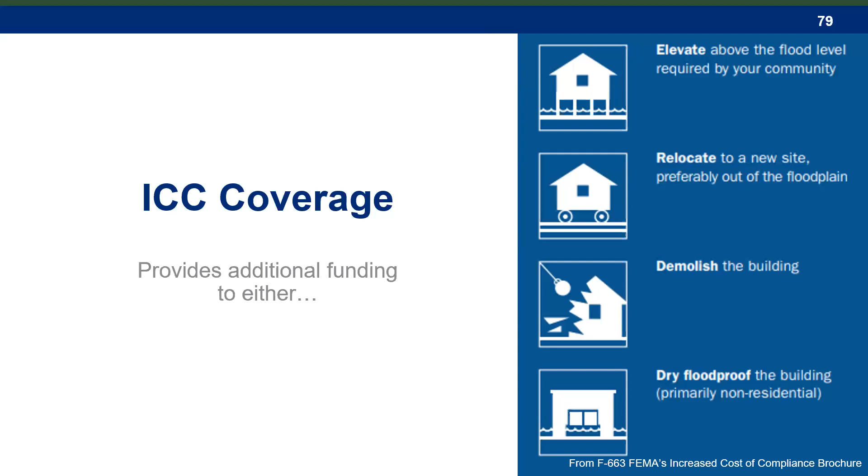So in order to be eligible for an ICC claim, that building has to be located within that 100-year, 1% annual chance floodplain, so in an A or a V zone. And the community is required to make a determination that that structure is either substantially damaged, or they've adopted a provision within their local law for repetitive loss structures and that structure has been determined to be repetitively damaged.

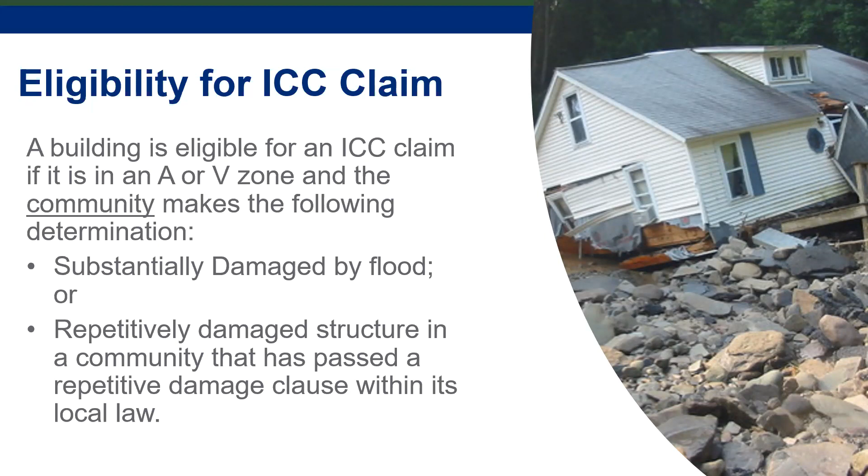So the idea behind this is that if there's a structure that has been substantially damaged by flooding, they would have money available to them on top of their claim to bring that structure into compliance, to hopefully not experience that flood damage in the future.

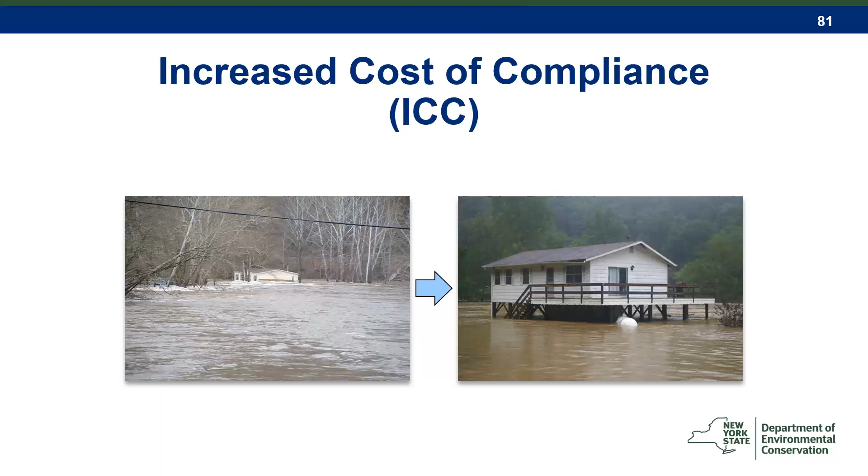Okay, so just to wrap things up here with some takeaways and resources. Benefits of proper enforcement for the floodplain management program are that you are going to have a safer, more resilient community. So providing support to your local code enforcement officer, who's oftentimes also designated as the local floodplain administrator responsible for administering this program, is really important. You're going to have decreased flood damages within your community, lower flood insurance costs, and you're going to be able to maintain property values as well.